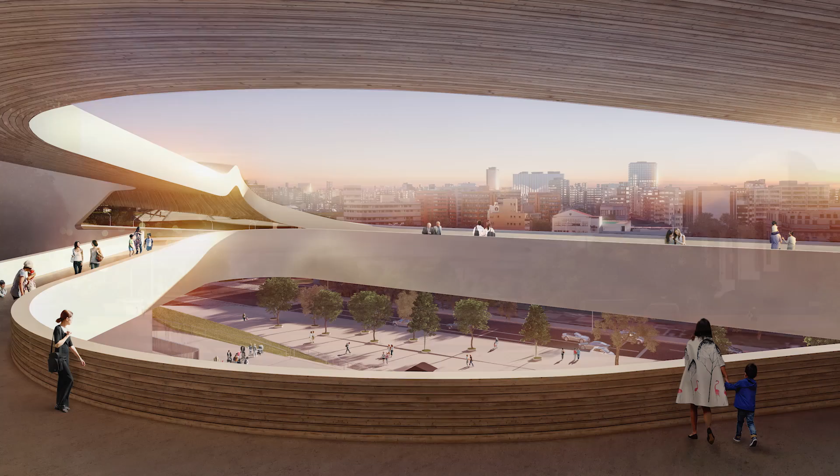One of the first shows we had done was in Japan 30 years ago. Well, I think the stadium project is a very important project for Tokyo because that was done as an international competition, which we won. It was a very serious team of people, of engineers, of architects who looked at this project for 2 or 3 years.

So it's an enormous investment. I think it's a very important project because it has a life beyond the Olympics. It has a legacy life. The team are a credible mix of international architects with sports planning and Japanese experience. Zaha Hadid Architects with Arup Sport won the international competition to design the new national stadium for Tokyo 2020 Olympic Games.

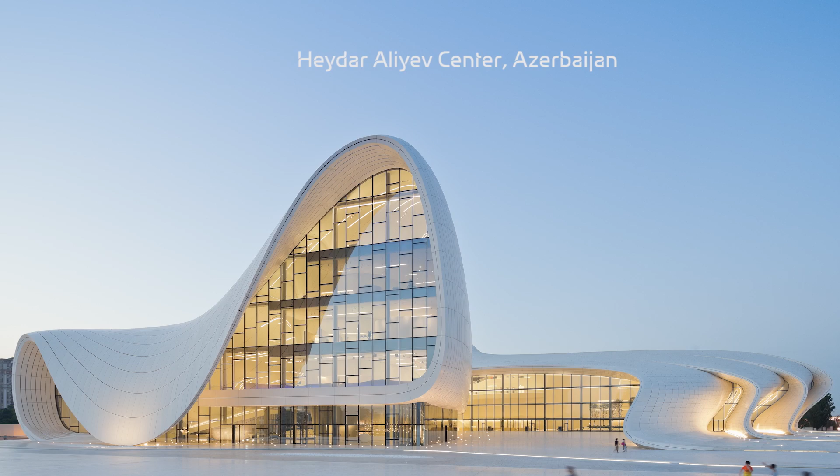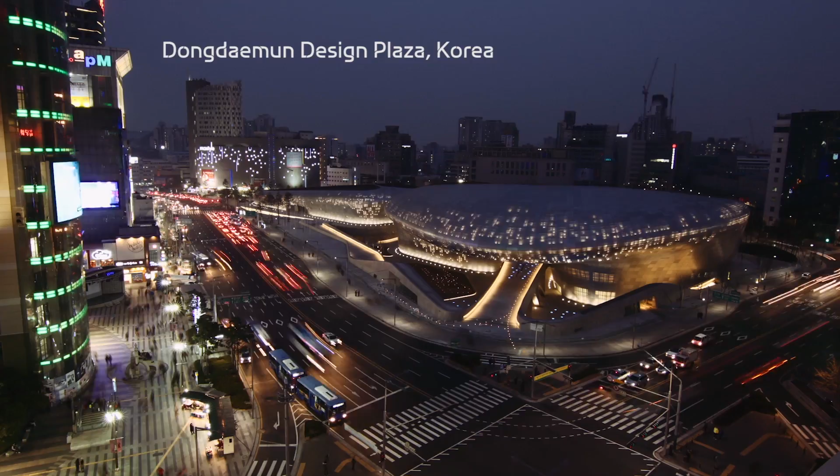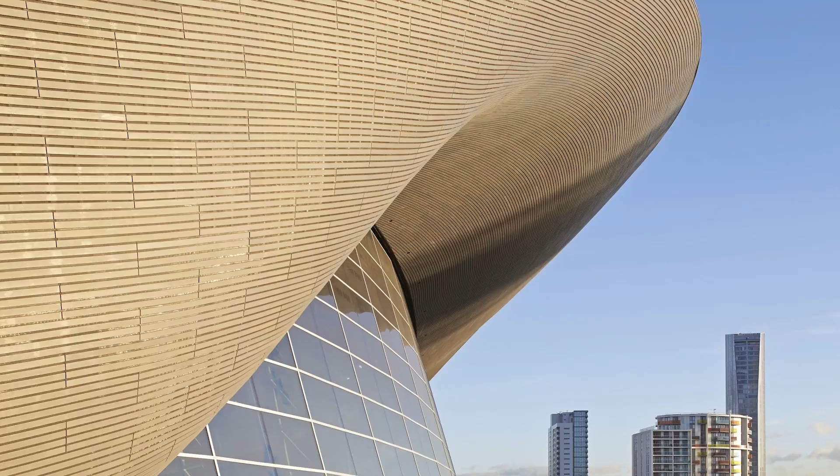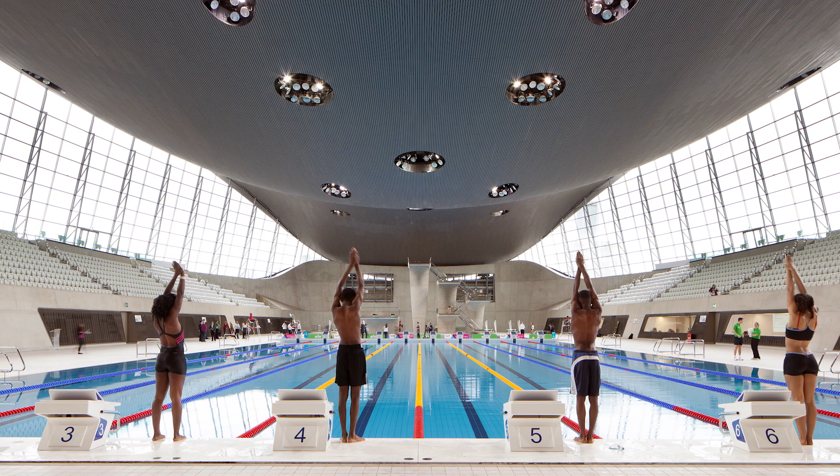ZHA have experience in working successfully with clients to design projects which have been built on time and to budget. ZHA designed the London Aquatic Centre for the London 2012 Olympic Games. The project was successfully redesigned to achieve a revised budget. The design used a mix of temporary and permanent seating to become one of the most successful venues of the London 2012 Olympic Games. The venue has since become very popular and well used by the public.

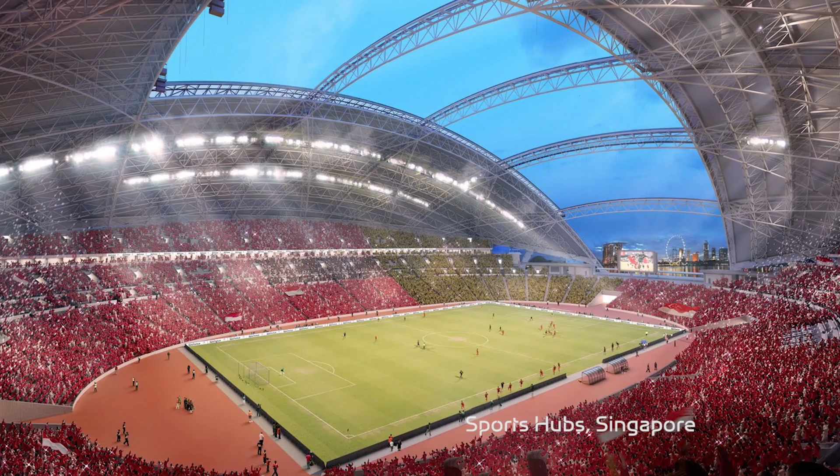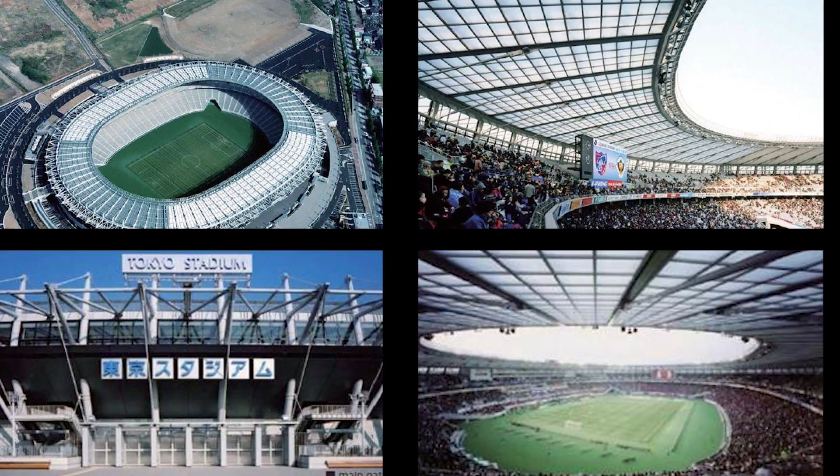Arup Sport have extensive stadium design experience, from the new multi-purpose stadium in Singapore's Sports Hub to the Beijing Olympic Stadium in 2008, the Allianz Arena 2006 and the City of Manchester Stadium 2002. We have been collaborating on the design with 4 of the largest design consultants in Japan, led by Nikken Sekkei. Between them, these Japanese offices have designed 3 of the stadiums for the FIFA 2002 World Cup in Japan.

The design was inspired by the past and future of Japan. The site is the site of the Tokyo 1964 Olympic Stadium, and it's an appropriate place to build a new national stadium which aspires to create a building which exceeds mere function to become a symbol of Japan's renewal and long-term optimism for the future. The basic components of stadium design are extrapolated to connect the stadium to a specific context of Gaien and beyond to Japanese culture as an expressive but efficient design.

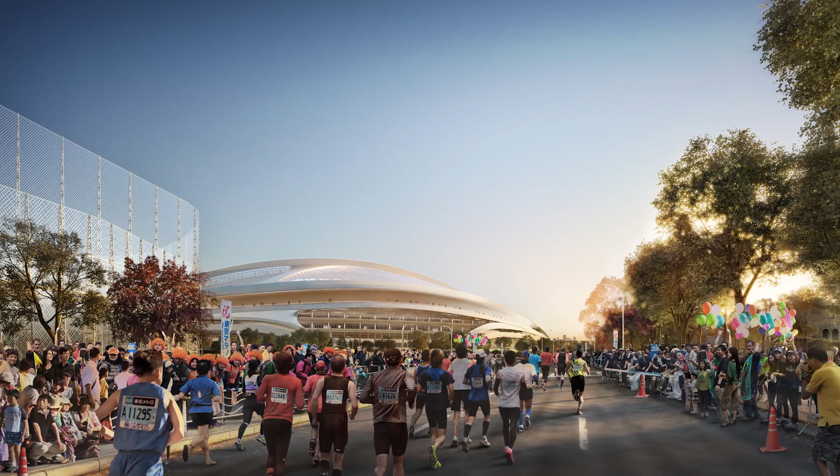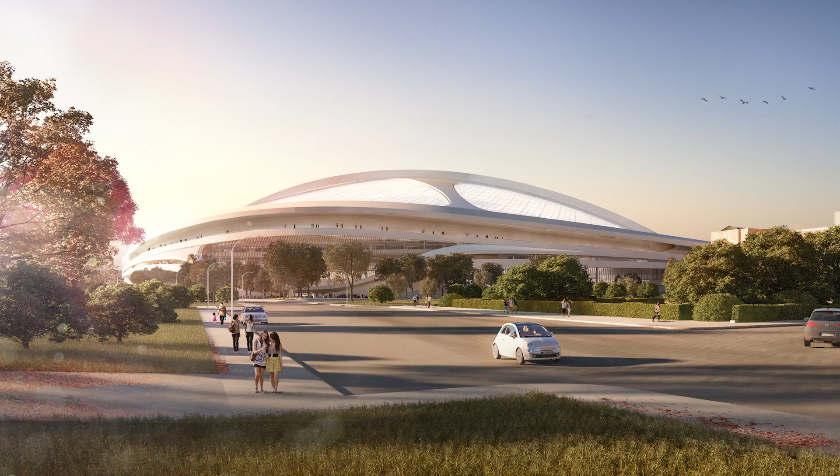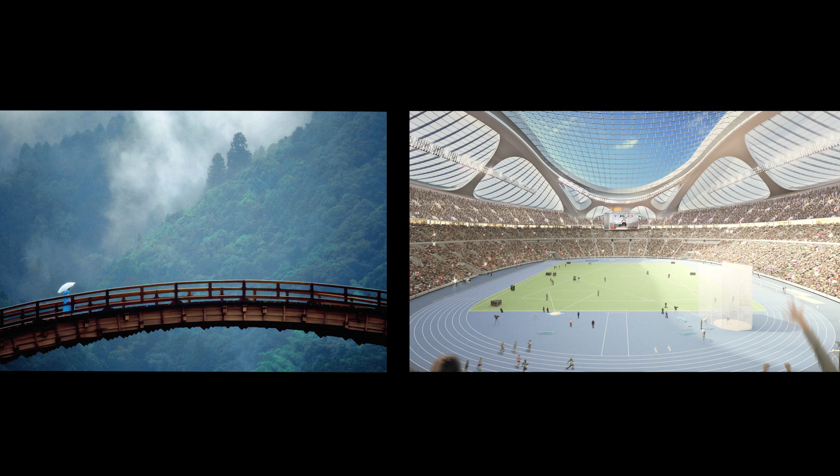The design is derived from the articulation of structure and circulation, where structure is required to create roof cover over long spans without columns, and a lot of circulation is required to safely move 80,000 people in and out of the stadium. Proposed for practical reasons, the primary structure of 2 keel arches have a similar intent in silhouette and symbolism to traditional Japanese landscape bridges, so that the new stadium is based on a key motif from traditional Japanese landscape design and an appropriate addition to the sports landscape of the Gaien area.

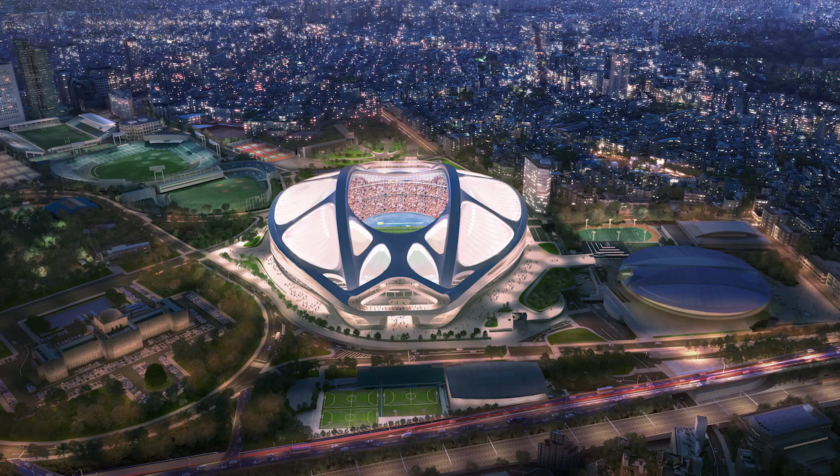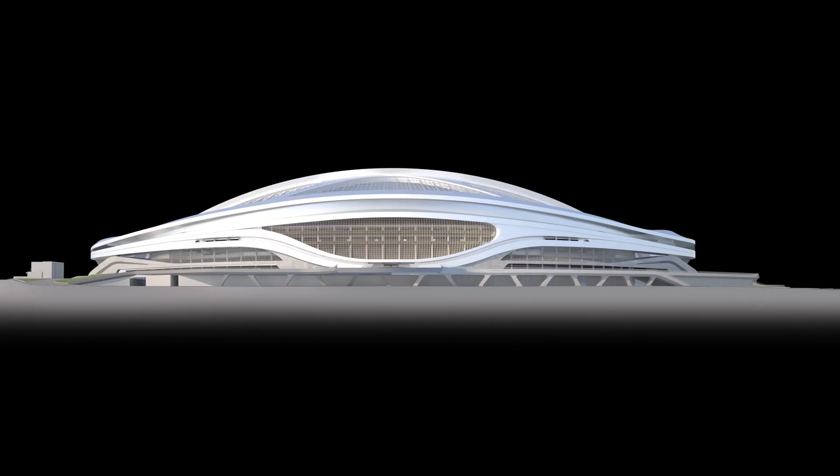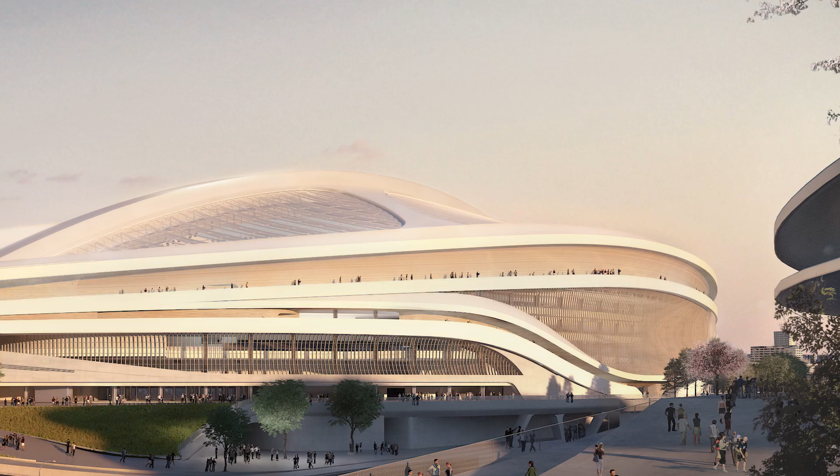With cross ties, nature is further embodied in the design, where the expressed structure creates a distinctive flower petal geometry, so familiar in nature and to the Japanese public who have a close affinity to nature and the passing of the seasons. The flower petal geometry of the roof is continued into the facade, where the structure is not only expressed but inhabited. A series of diagonal stairways and elevated walkways are developed into an envelope of the stadium so that it functions as a stadium on event days, and every other day it's an extension of the pedestrian landscape of the Gaien area, allowing extended walks and elevated views over Tokyo.

All of these public walkways are lined with Japanese timber, giving a tactile familiarity to the stadium which ties it back to the fundamental material of the Japanese environment and experience. The majority of facade is broken down by the petal geometry and clad in Japanese timber louvers, so that the overall effect at pedestrian level is a subtle interplay of Japanese timber cladding, giving the experience to the visitor of a direct resonance to the tree-lined landscape of Gaien and Japanese culture.

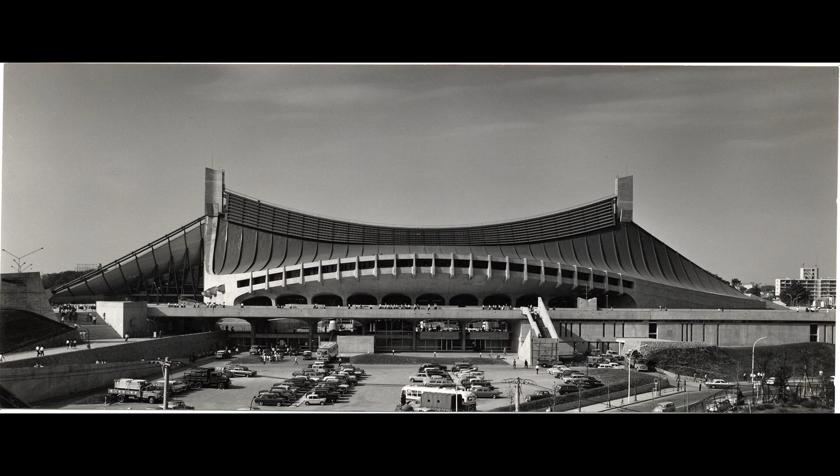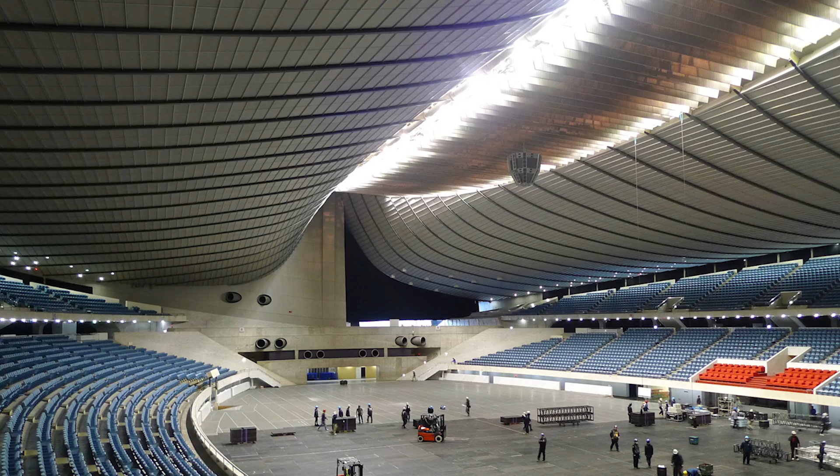The majority of roof structure is provided by catenary beams, which resonate the innovation by Kenzo Tange with his catenary beams for the Yoyogi National Gymnasium. We aspired to make the new stadium connect visually and symbolically with this Japanese icon of optimism, so that Tokyo 2020 leaves Tokyo with a stadium as well conceived and as beautiful as this gymnasium from Tokyo 1964.

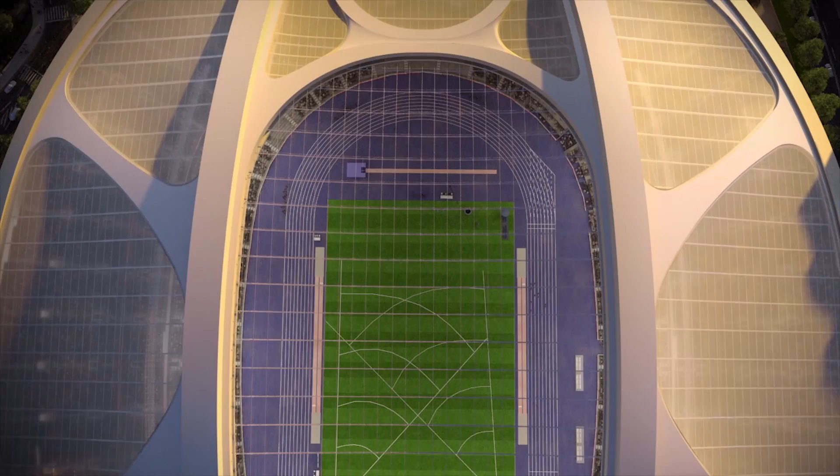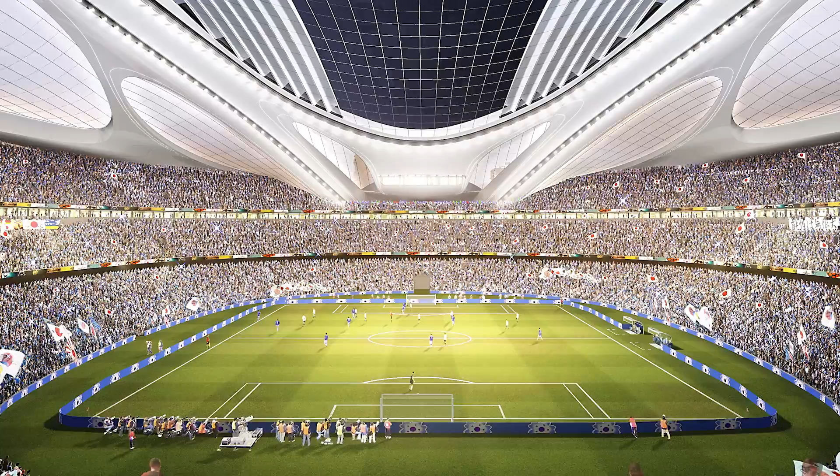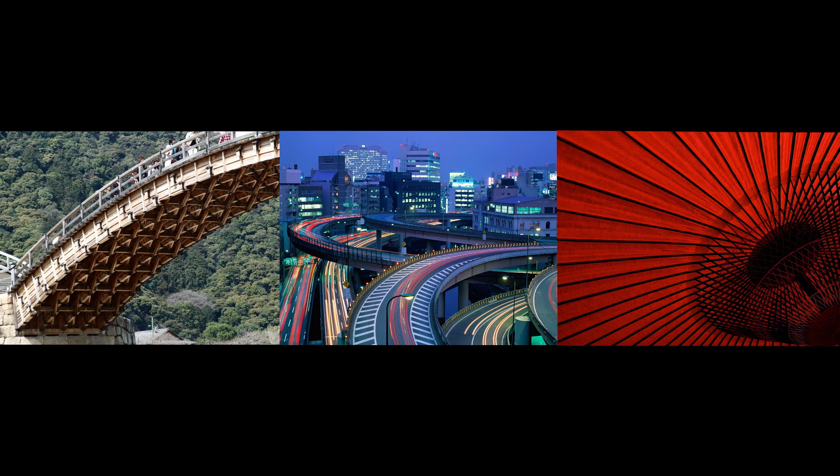The roof is covered in transparent, lightweight fabric. The roof allows daylight in, allowing good turf growth, whilst allowing the spectators to experience the pleasure of daylight as they watch the events. At night, the stadium will glow and take on the appearance of a Japanese lantern. Together, the arches, catenary beams and lightweight fabric combine to create an overall effect that represents the traditional craft and modernist innovation of Japan, so that it creates a renewal of the Japanese spirit of optimism for the future based on their confidence of their past.

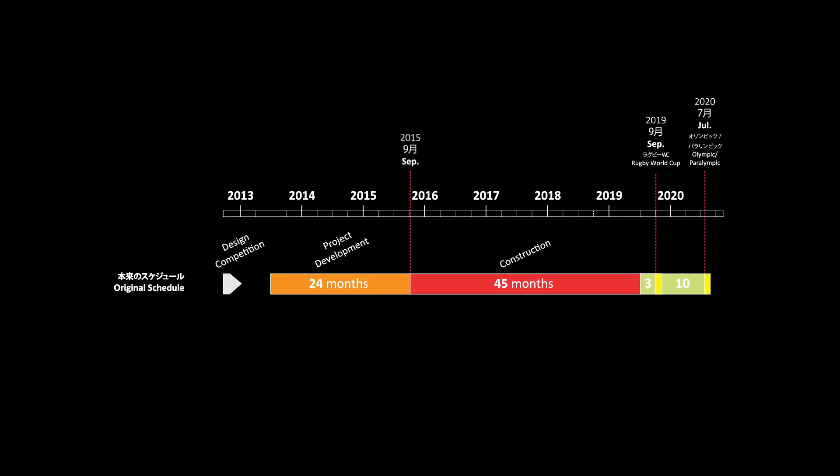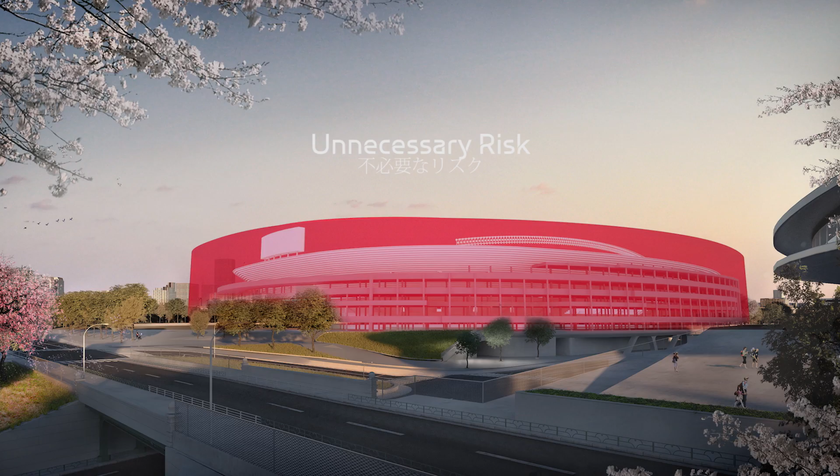Our new national stadium design has been 2 years in the making, and it is ready to start on site this year. It can be ready for the Rugby World Cup of 2019 and the test events before the Summer Olympics of Tokyo 2020. To start the design from scratch is an unnecessary risk which we think the government should reconsider if its aim is to achieve a lower price than 252 billion yen. We believe the answer is to introduce more competition between the contractors, but to not lose the benefits of the design.

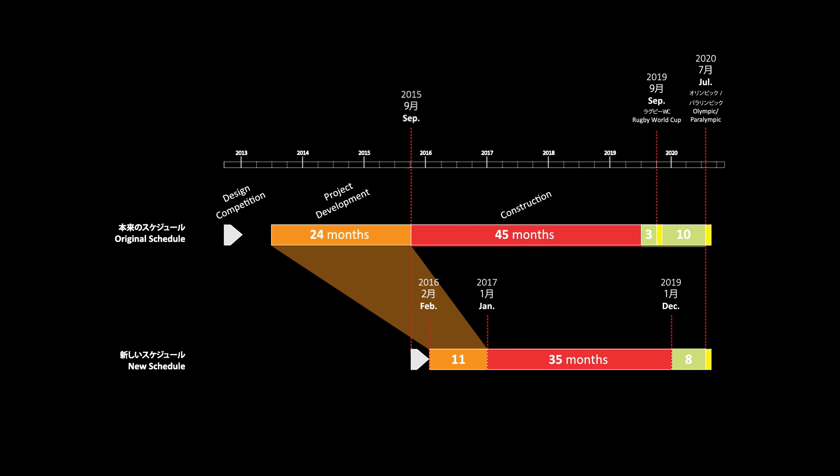The site is complicated and the majority of design will remain valid because the basic requirements of seating capacity and support facilities will remain the same. A new process should be used to get a lower price, but it should not waste the design work done to date. A new process will only allow a very short design period, and by the time certainty on design and price is determined, it will be too late. Instead, change the current design now to get certainty on costs.

A new process to find a contractor will result in the same limited number of Japanese bidders that competed for the project last year. Even if the tender is open to international contractors, only one of the 5 large Japanese contractors will be able to qualify or win the bid. We understand that there are only 5 contractors in Japan who will have the necessary stadium experience and size of turnover to qualify to bid for the project.

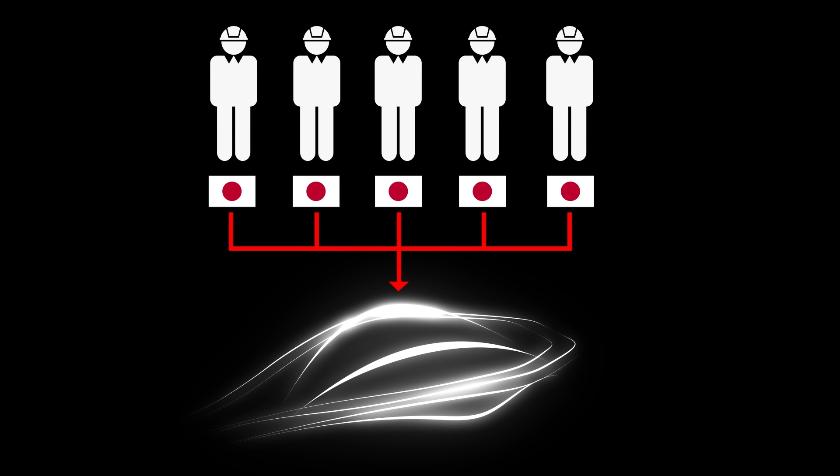2 of these 5 contractors worked on the project and produced the price of 252 billion. There is limited competition available, and this is the underlying issue to be tackled. We think the new process should concentrate on achieving competitive bids based on the existing design with the option to provide cost savings to achieve the project on time and on budget. This way, the design is not wasted and the risk of failure to get value for money is avoided.

The current design is defined by the client's brief, which is an outcome of their legacy business plan, which needs to generate revenue from key stakeholders such as the J-League. For the past 2 years, the client's brief was for a multi-purpose stadium with an adjustable seating bowl which is able to switch sports modes between athletics or football with an operable roof to close the roof opening and allow concerts.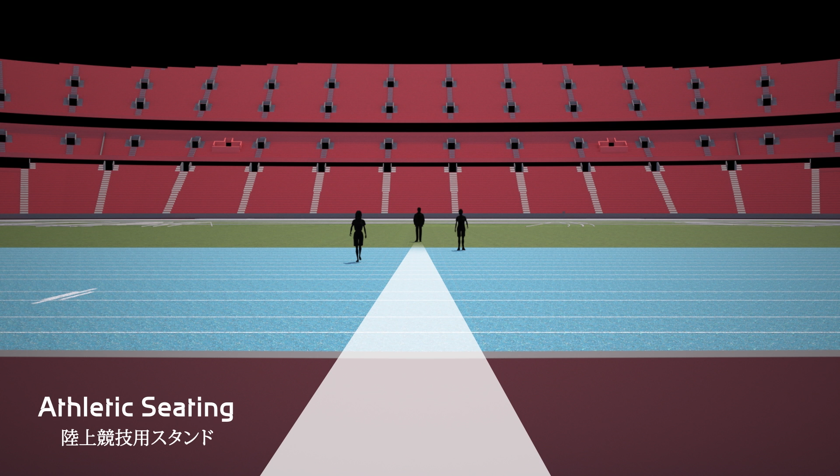If the government decides to change their brief to a fixed athletic seating bowl of 80,000 seats, it will not be sustainable. If football is watched from the distance of an athletic seating arrangement, it's too far away to create atmosphere and it will not be popular. An athletics formatted bowl is not acceptable to FIFA and will not be acceptable to J-League for national football events. To be sustainable, the investment needs to be focused on long-term usage after the Olympics, and that means being able to accommodate football, which will be the largest user and revenue after the 2020 Games.

There are many options available to achieve this objective, but there are certain key parameters to stadium design which we think need to be understood. To illustrate these parameters, we will use a cross-section of the stadium which encapsulates the basis of stadium design. It's important to understand that the size and volume of stadium enclosure is not only determined by the seating capacity. There are other factors which will need to be incorporated in the new stadium, regardless of its seating capacity. And these factors also determine the size, cost, and sustainability of the stadium.

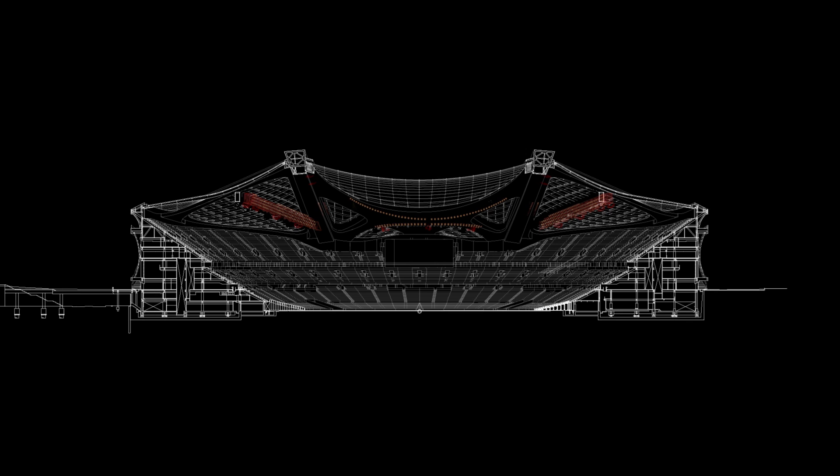To host the Olympic Summer Games, television requires high-definition lighting to be able to broadcast. This requires the stadium to incorporate lighting at a height of 50 meters surrounding the field of play. It's a large field of play with many track and field events occurring in different locations. Each of these events needs to be lit to the same high standard. The lighting also needs to work for football, which is a different and smaller field of play. This requirement means either above or below the roof, an extensive gantry needs to be built at a height all around the field of play. Regardless of seating capacity, this lighting is required.

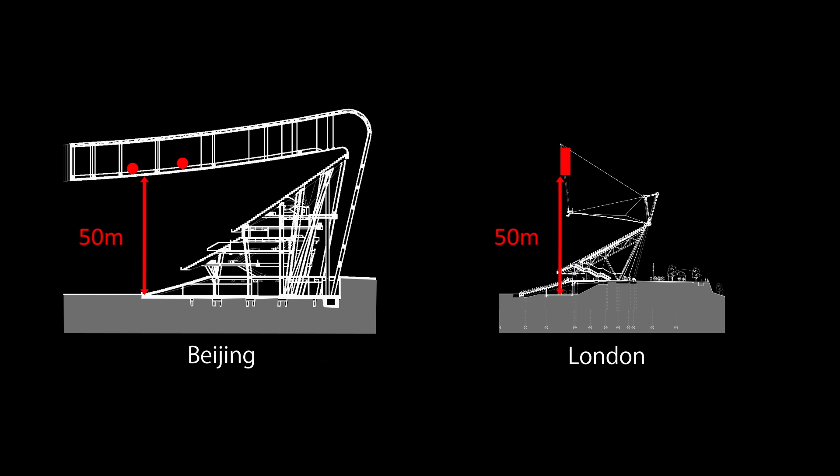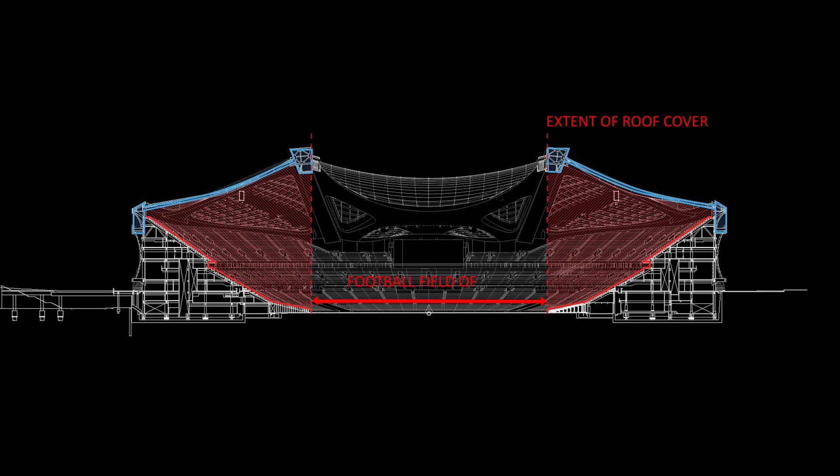The extent of roof cover over the seats is directly related to the amount of seats. Its fundamental purpose is to protect spectators from the weather. In the case of Tokyo 2020 Olympic Games, the weather is hot and humid, so the roof should provide as much solar protection as possible to make the spectators comfortable. If the stadium is to work for football, the extent of roof should be determined to cover all of the seating in football mode. Building a roof once to work for athletics and football will result in the best return on the investment and mean the stadium is sustainable in the long term.

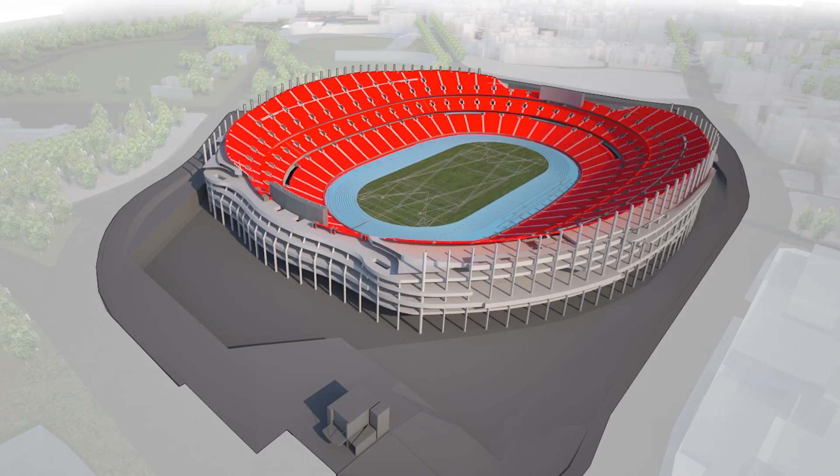Any stadium will host a limited number of events in any year, and stadiums are difficult to make work as a business. For the new national stadium, it was projected it would only host 40 events, including 10 concerts in any given year. There are potentially 80,000 customers at any event, so it's imperative that the stadium design maximizes the amount of revenue that it makes at each of these events.

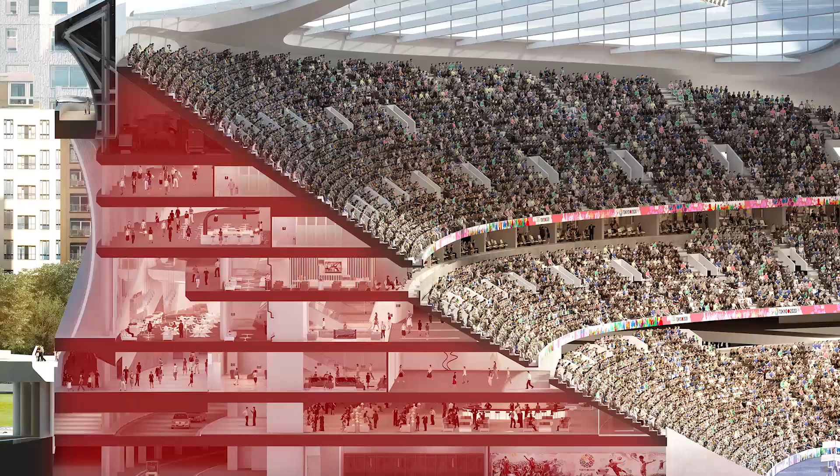In modern stadium design, this means more dining facilities within short travel distances to increase the duration of stay and spend by spectators to any single event. This means that in addition to the fixed seating, there needs to be facilities in close proximity to all seats to ensure revenue is generated. The current design is designed on this basis, and it should be retained to be sustainable not only in terms of usage but also revenue generation.

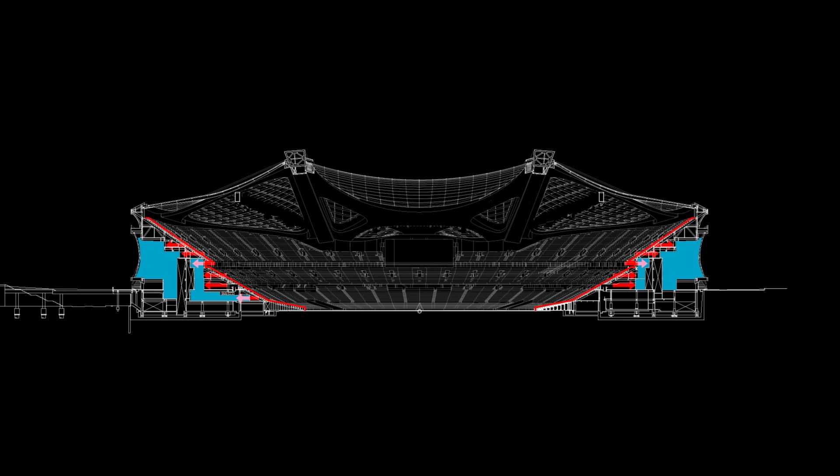The site is a very constrained urban island site, surrounded by roads on all sides with extensive level differences to navigate and height limitations for any development. The complexity of managing to fit the field of play and seating bowl on the site, along with arranging level access in multiple directions, means that there are very few design options available. Our current design is optimized for this particular site.

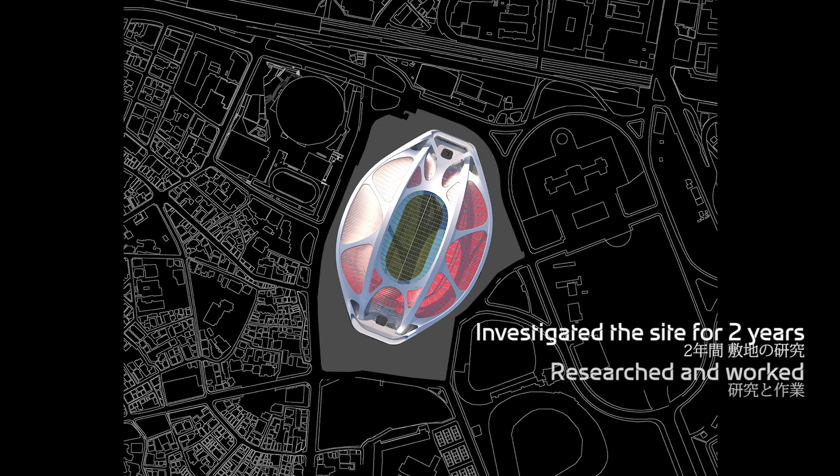Having investigated the site for 2 years, we have researched and worked to produce the most feasible long-term solution for the site. The site area is small, so the design has been optimized to create as much external precinct area available as possible for crowd flows by allowing the non-ticketed concourse inwards to create a compact footprint and safer site for crowd management.

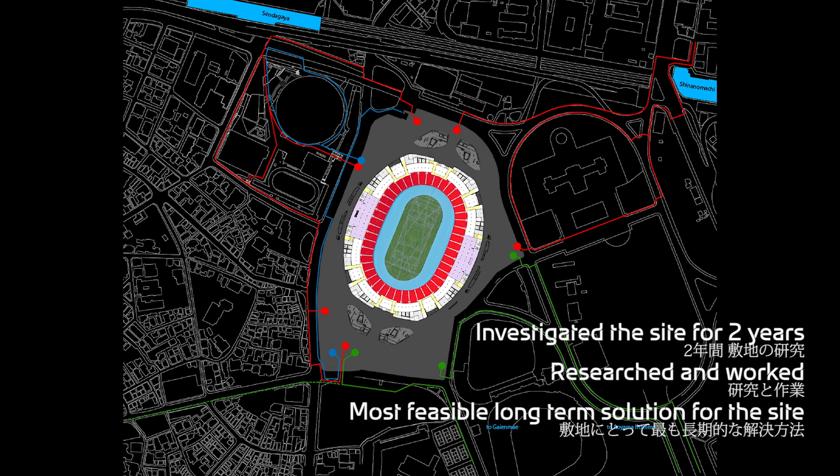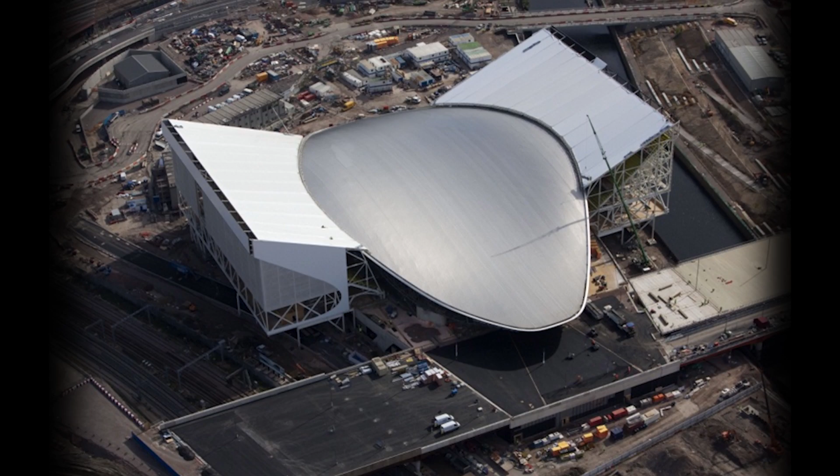We have tested many bowl options, including the use of temporary seating. We proposed an option in 2013 to the client to achieve some of the 80,000 seating capacity by using temporary seats. This option was rejected at the time as the client's brief was and remained to have 80,000 permanent seats in legacy. We know from direct experience in London 2012 that mixing temporary and permanent seating on a constrained site is difficult, and it is not a way to save costs.

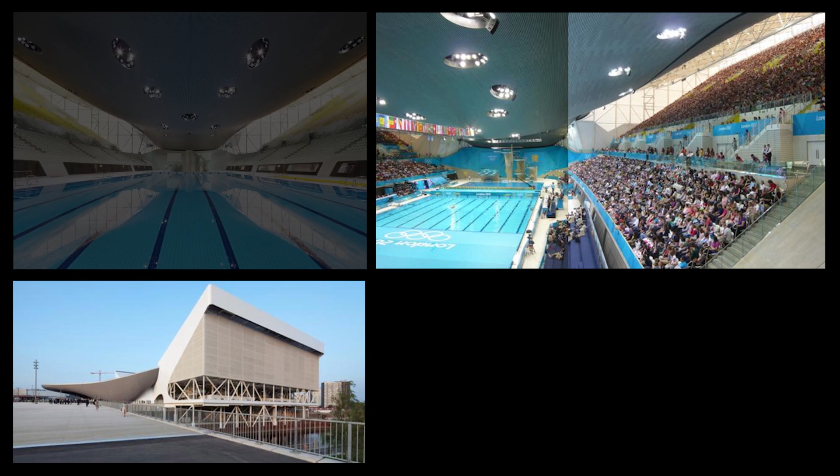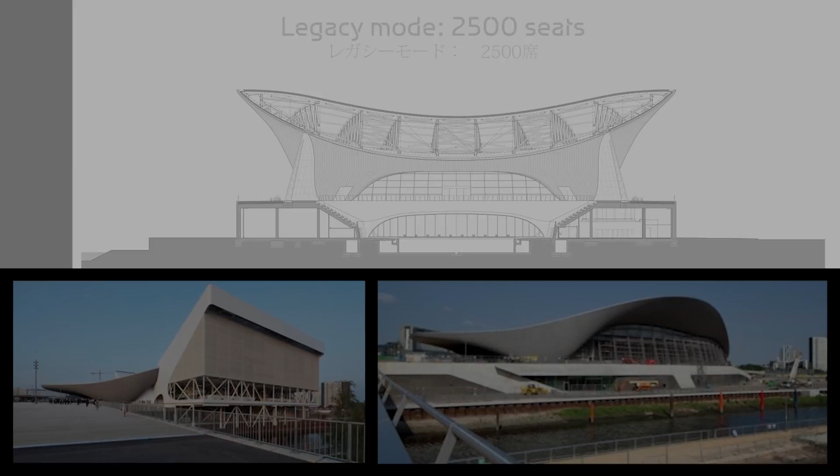It is a valid option if the long-term objective is to achieve a lower permanent seating capacity. This is the reasoning behind the success of the London Aquatic Centre, which was reduced from 17,500 in 2012 to 2,500 after the Games. The Sydney Olympic Stadium used 30,000 temporary seats. Although conceived as temporary, they were built to similar standards as permanent stands to achieve compliance with code. They took a significant percentage of the overall construction budget and took longer than anticipated to convert to the legacy stadium format after the Games.

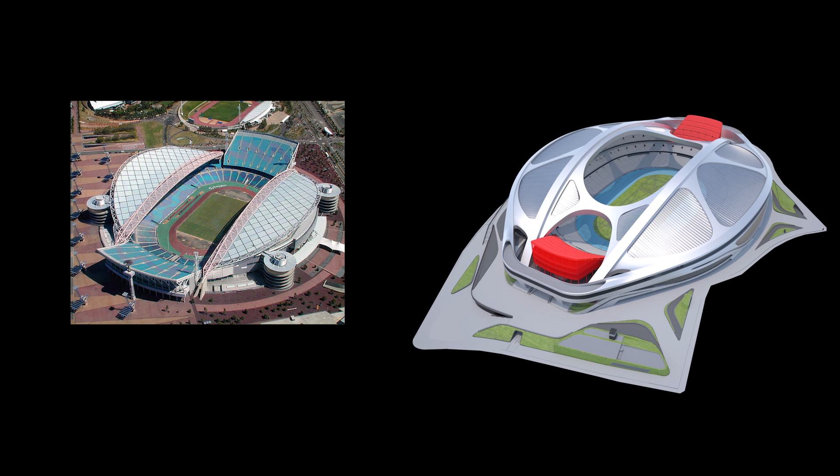We should learn from London and previous Olympics on the use of temporary seating. The reasons for choosing this option need to be determined not to save costs or time, but to satisfy the long-term business plan after the Games. The option remains possible with the current design, and the keel arches of the current design are similar to the structure designed for the same purposes in Sydney.

We have developed the design to turn the requirements of the brief and site into benefits for the local community, Tokyo and the nation as its national stadium. To start, and given the constraints of the site in size and height, we have produced the most compact bowl footprint possible for a multi-purpose stadium design.

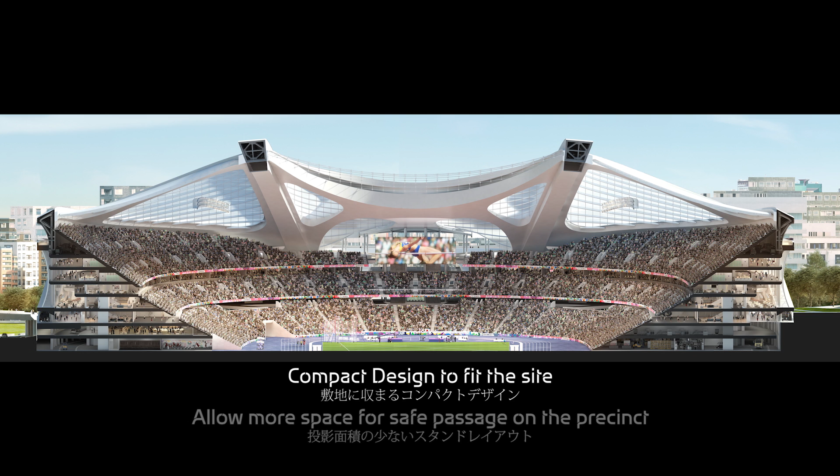Using Arup Sport's experience of previous Olympic stadium design, the design achieves a more compact design to fit the site, allow more space for safe passage on the precinct, whilst achieving better proximity to the field of play and better quality of view for all spectators by comparison to the previous Olympic stadiums of Beijing in 2008 and London in 2012. The compactness of the design has brought spectators significantly closer to the action in both athletics and football formats and provided them with an enhanced quality of view when compared to London and Beijing. The result is a very efficient, sports-focused stadium design which has been optimized for this specific site.

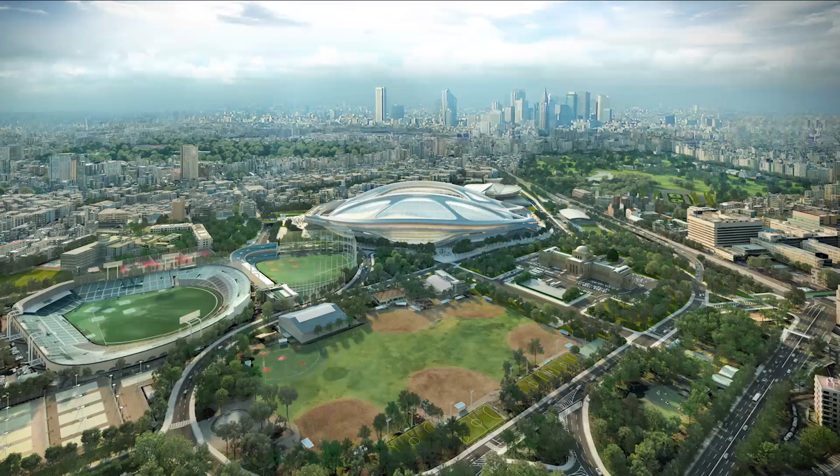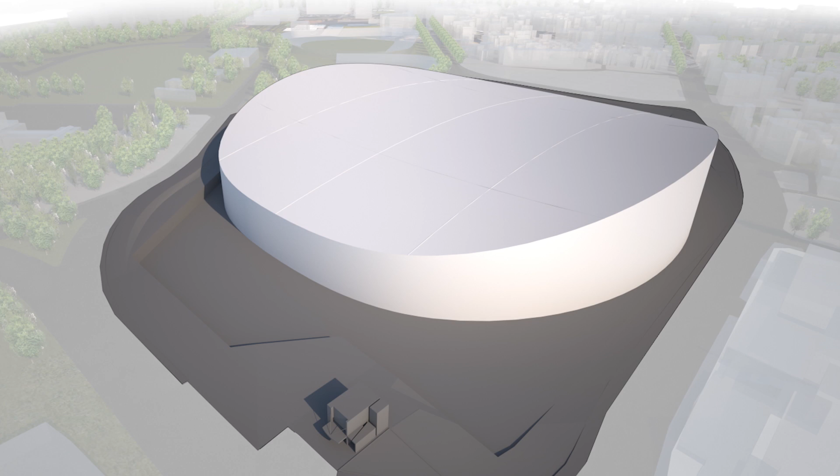We have been aware since our competition submission in 2012 of the sensitivity of the site location with respect to the size of the stadium. This is the reason why we proposed a saddle seating bowl as opposed to a flat-top bowl. A saddle seating bowl is shaped like a saddle, which means it's got a varying height, and its benefits are twofold. The first is that it allows the majority of seats to be positioned in the most popular location along the middle of the field of play and requires less seats at the ends. The result is more seats that are easier to sell.

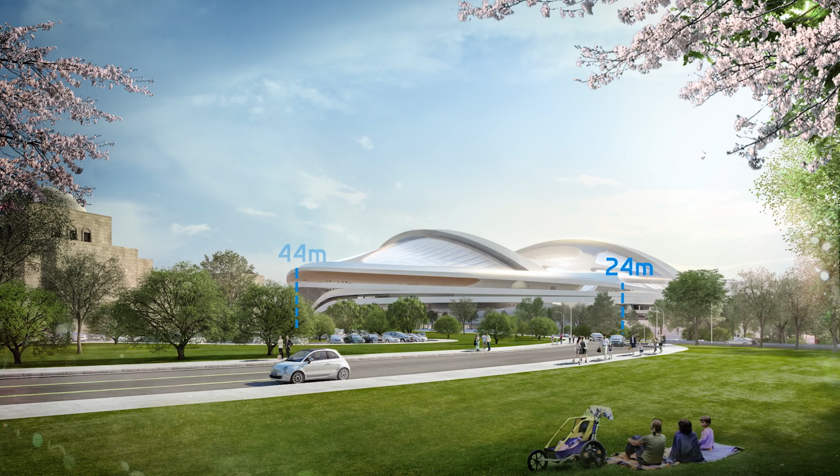The second advantage of the saddle bowl is that externally, the pedestrian perception of the stadium is much reduced, where the inclined elevation of the stadium comes down as low as 24 metres and rises to a height of 44 metres, so that from most viewpoints it will look and feel like it's lower. By comparison, a flat-top bowl would be a constant height of approximately 40 metres, which from all viewpoints will look and feel like a wall 40 metres high.

The saddle bowl profile allowed the development of a unique additional public feature, the sky bridge. This feature of the design is not essential to the stadium functionality, but it's a gift to the public realm of Gaien. The sky bridge is an elevated walkway following the saddle bowl profile. It allows a daily usage of the stadium with elevated views, and it connects it into the daily walks or runs of the public in the Gaien area.

The sky bridge will be open every day, creating more direct access with the stadium than its event schedule. It was intended to allow the stadium to become a more used part of the city fabric on a daily basis and more integrated into the promenade culture of the Gaien area.

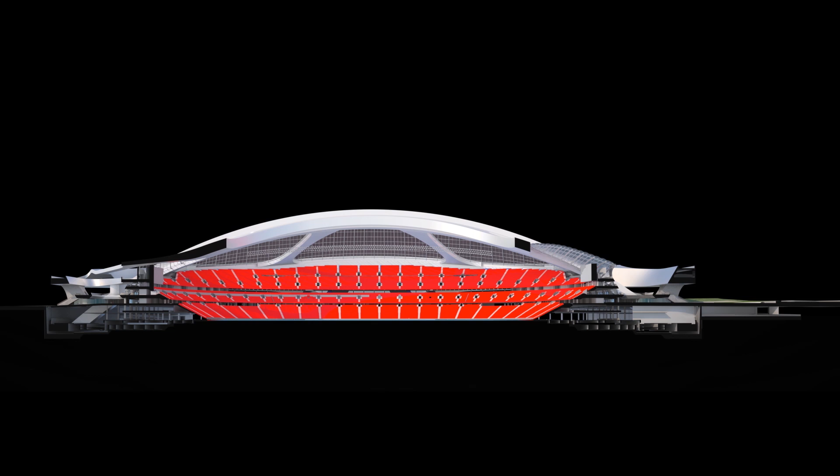With our experience of previous Olympic deadlines, it was clear that the stadium design should have advantages in saving construction time. We propose keel arches which span the longitudinal direction of the field of play, create column-free views, and rest on the ground. As they rest on the ground, it means that the arches can be built in parallel to the seating below.

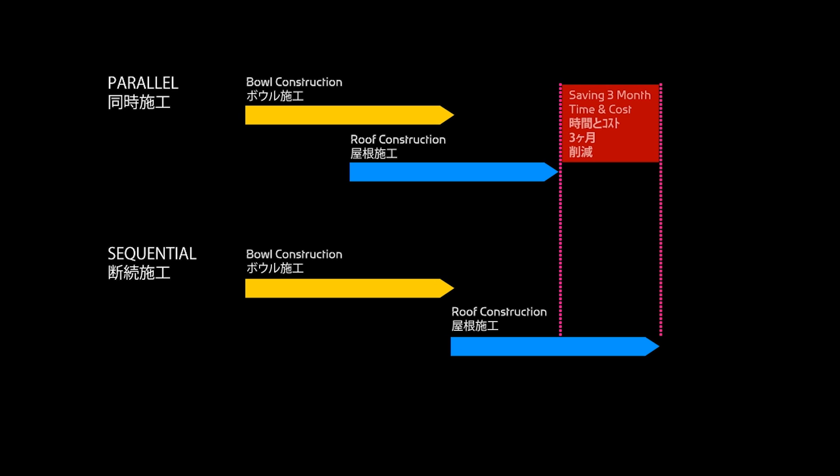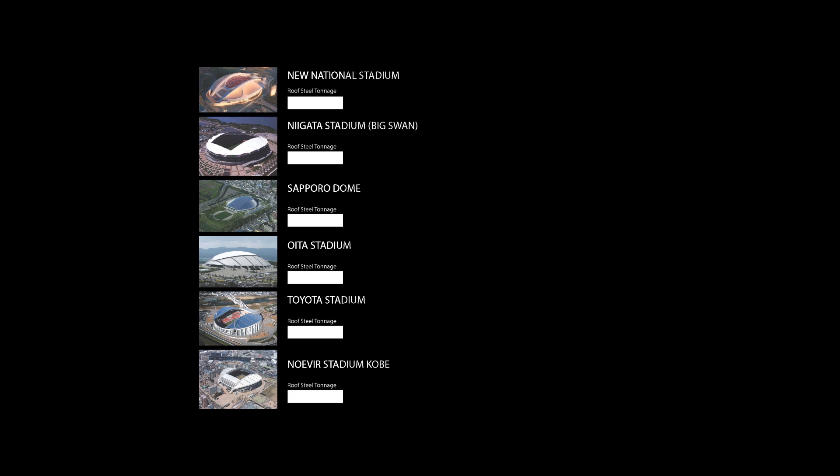We believe this approach will save 3 months in construction time compared to a sequential build of bowl first and then the roof. This time saving will be critical in achieving a fixed deadline, and it will have cost-saving benefits as well. This design benefit did not materialize in the joint venture bid, but it remains possible under a new bidding process. The efficiency and cost of the keel arch design is possible to measure by comparing its tonnage to other stadium roof constructions of similar span lengths and seismic conditions as Tokyo. We undertook these studies, and the keel arch is an efficient and cost-effective solution with many benefits.

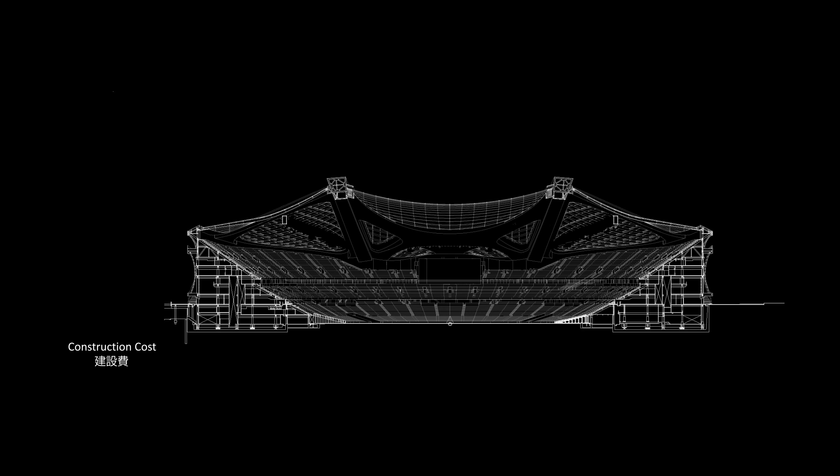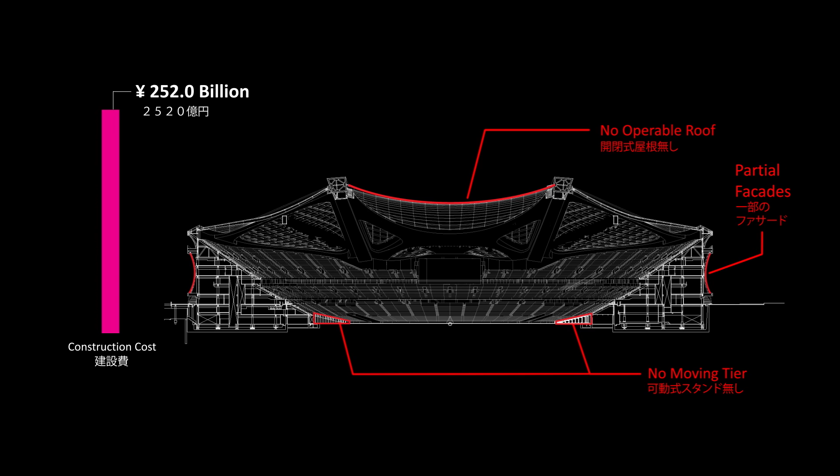Before defining a new budget for the stadium, the current price submitted by the contractors should be better understood. It was not the price of the design as we have described. It was a price based on considerable omissions from that design. The price of 252 billion yen did not include the operable roof, nor the moving seating tiers, and only a partial enclosure of concourses. It was therefore already the market price of a fixed athletic stadium of 80,000 permanent seating. Save for the sky bridge, 252 billion yen is the current price in Tokyo for a basic 80,000 stadium on that site. A new process needs to change the market conditions in Tokyo, not the design.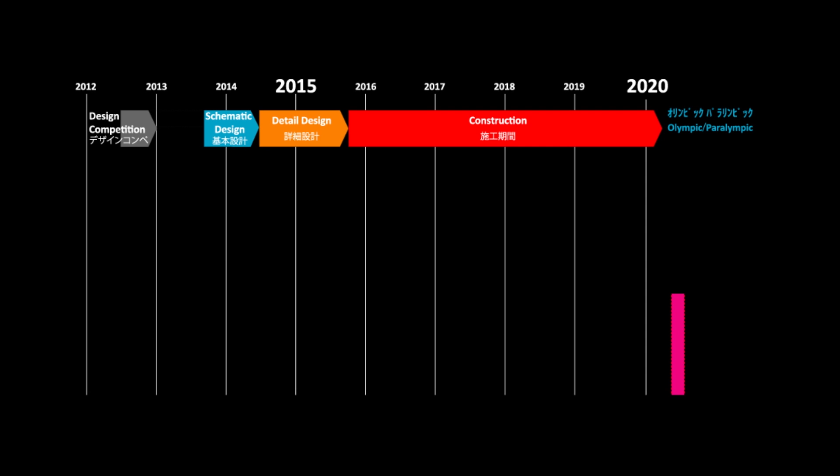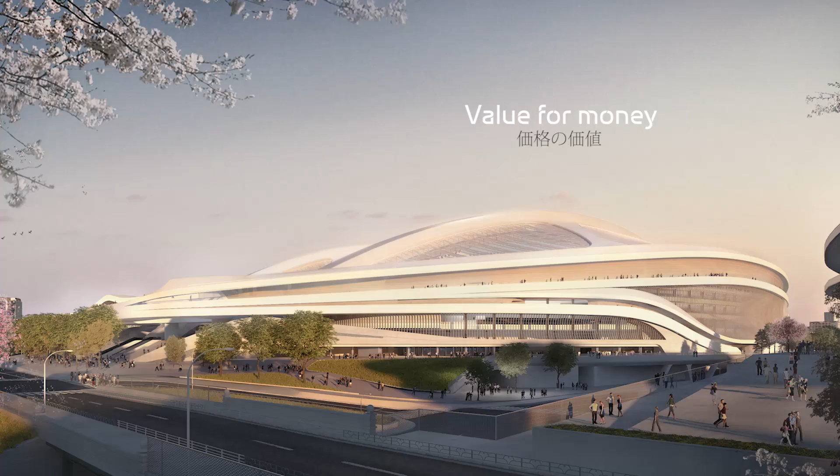It should also be understood that immovable deadlines, such as the Olympics, combined with limited competition in the marketplace, create inflated prices. The determining factor in the price is the market and the demand on materials and labor. The design is not the determining factor in these circumstances. Rather, the design should be seen as the only way to achieve value for money in the market. Without a design as a contractual commitment as much as time and cost, there will be considerable risk to achieving value and return on the investment.

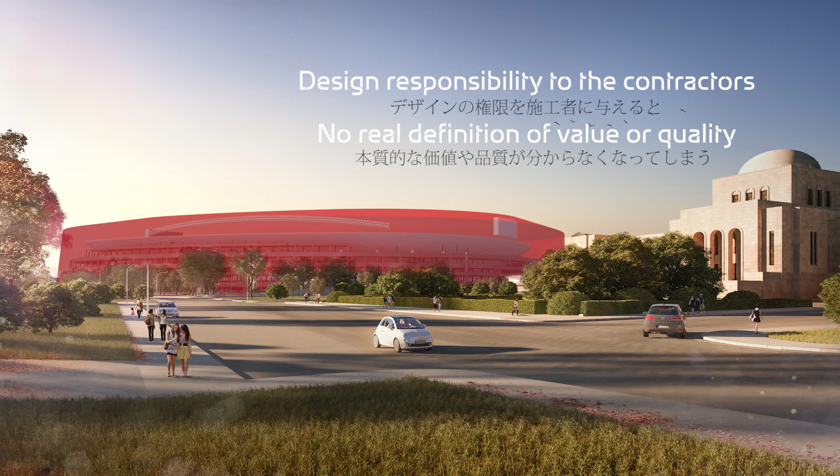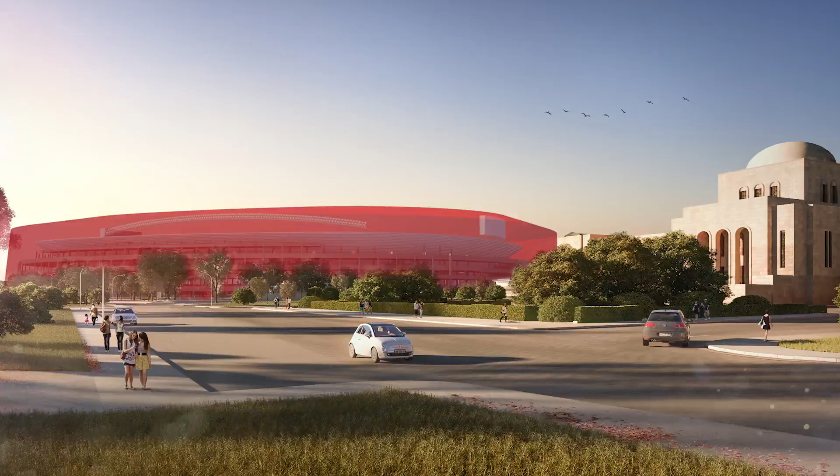The current design can be redesigned to achieve a lower budget, but it should be retained in principle so the Japanese public achieve this value from the market and they get a long-term return on the investment. Giving the design responsibility to the contractors means that there is no real definition of value or quality except for a price and time schedule. A new concept design submitted with a price cannot be trusted after 5 months of design work. It takes much more time to determine a new design with complete price certainty, and by the time that certainty is achieved, it will be too late. The Japanese public will get less for their money with this approach.

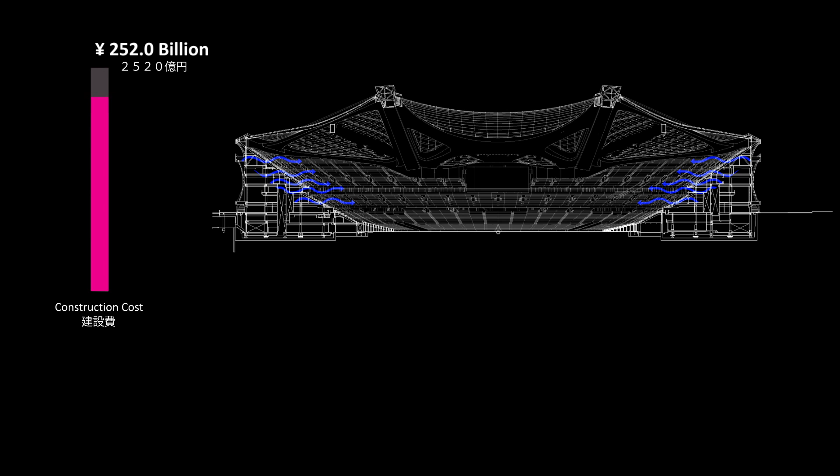So why take the risk? There is a design which will achieve quality, and it can be changed to meet a new budget. Why risk everything when outcomes are so uncertain? Further cost savings can be considered, such as omitting air conditioning for the seating or omitting the sky bridge. But the stadium design is compact and efficient. It cannot be improved upon unless the fundamental criteria of seating capacity alter or a more competitive bidding situation is created to lower the price.

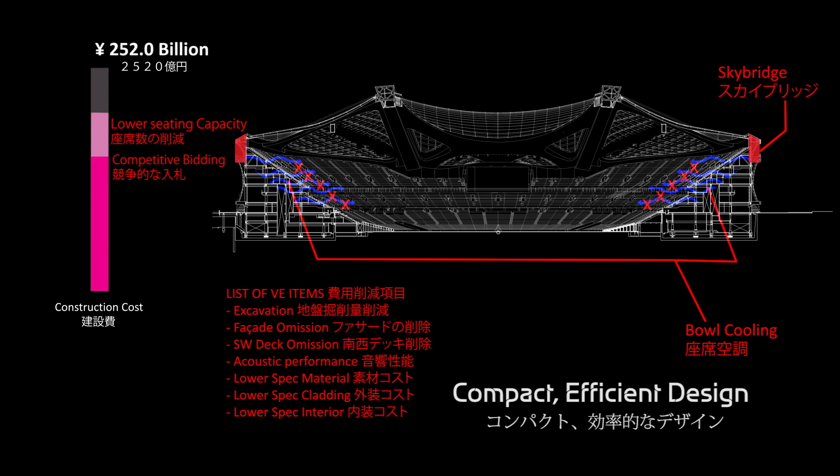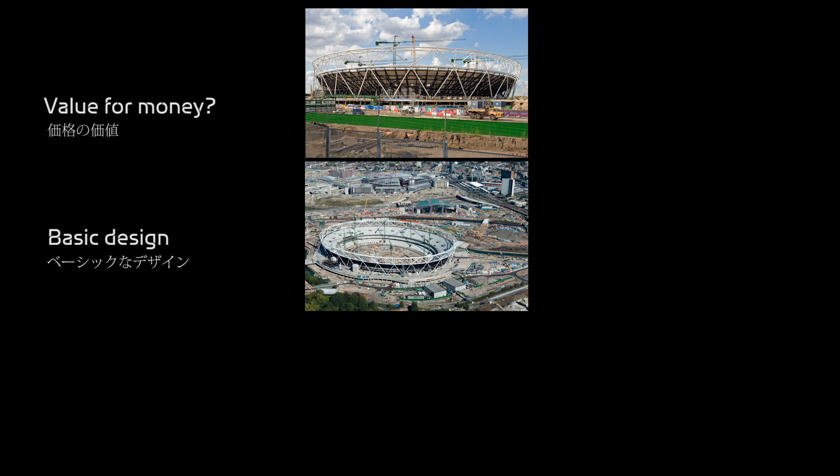Tokyo should learn from London 2012 and its Olympic Stadium. The London Stadium was design and build. As a comparative cost to the 252 billion yen price for the Tokyo Stadium, it cost 218 billion yen. No one can think that the London Stadium represents value for money. The design is very basic and the operation will be permanently compromised by its conception. It was built in 2012 as a fixed athletic stadium with 80,000 seating. The upper tier of 55,000 seats was supposed to be dismantled afterwards, so all facilities were placed on the ground with long travel distance. This mode cost 138 billion yen.

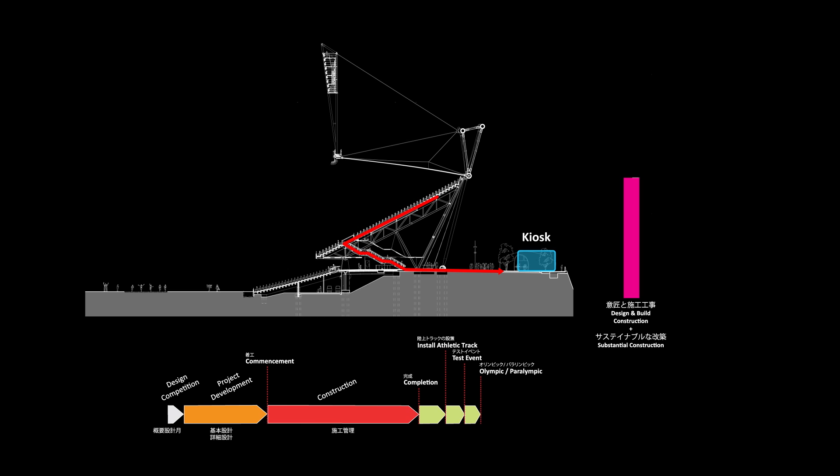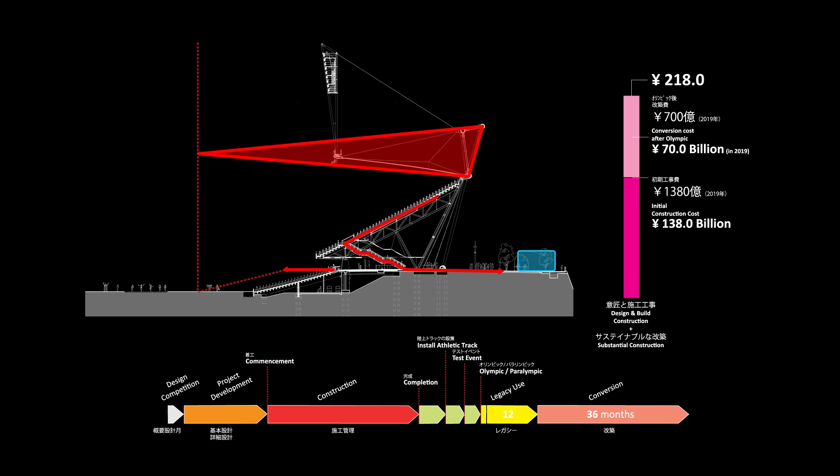After the Olympics, to make it sustainable, it needed to be modified to work for football. So a moving tier was introduced, the roof needed to be extended, all of the steelwork needed to be re-welded. These amendments cost a further 70 billion yen, taking the total cost of the London Stadium to 218 billion yen. And it will remain a compromised stadium, designed only for athletics and adapted retrospectively to accommodate football. In football format, it will never generate the intensity of a true multi-purpose stadium bowl, and the extended travel distances to facilities from the upper tiers will make these seats hard to sell.

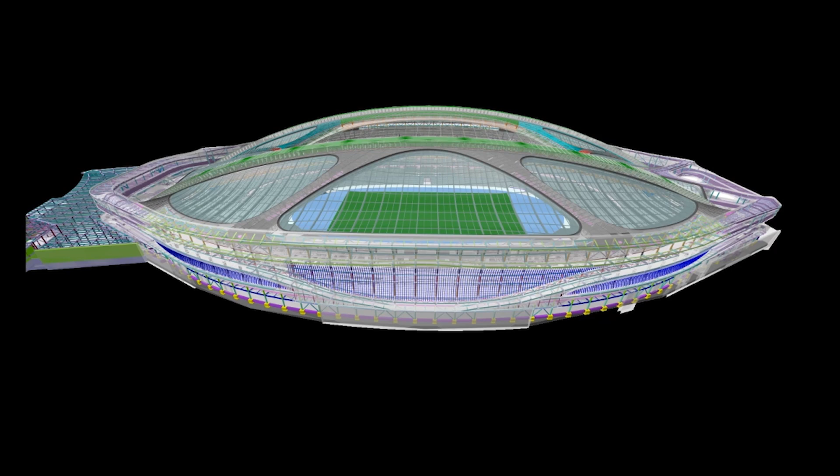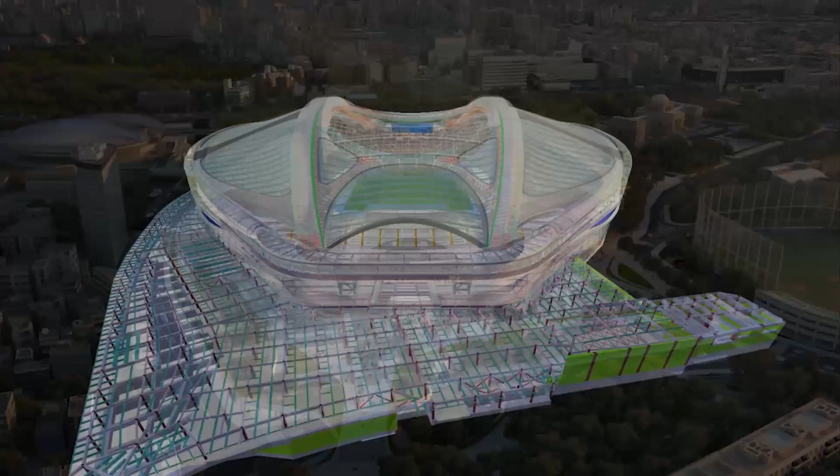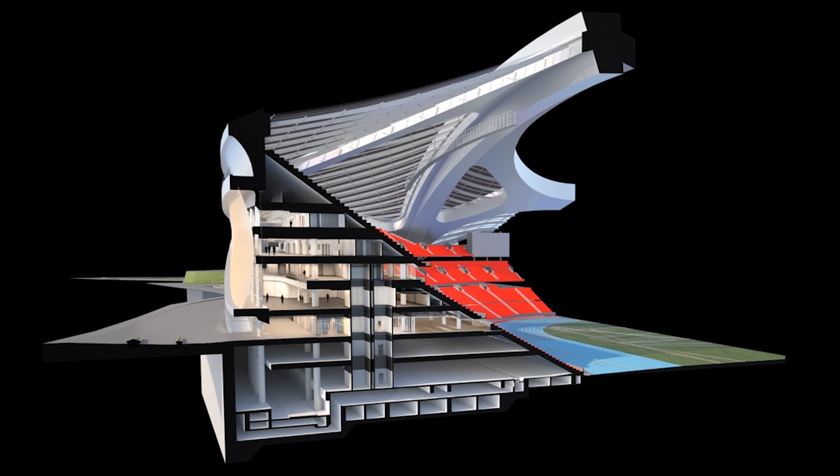Tokyo should avoid these mistakes and use the current design to achieve long-term sustainability and value for money from the market by using the design which is efficient and adaptable to change. We understand the need for the government to undertake a new process to get a better price, but it should not take an unnecessary risk on the design, and it will get more for the taxpayers' money by retaining the current design. It is a unique design which has been thoughtfully developed over 2 years to be not only beautiful, but compact and efficient for this specific and special location in Tokyo. The current design encapsulates all of the lessons learned from our direct experience of other Olympic stadiums. This knowledge and experience should be retained so that Japan gets a stadium fit to be called its national stadium.